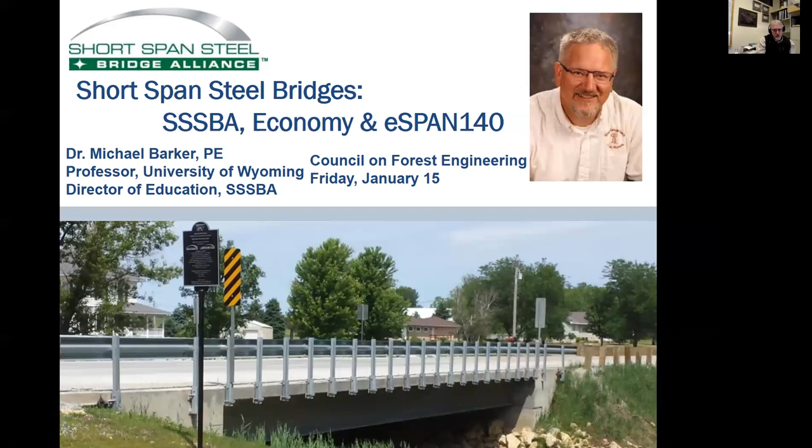So here's the plan for this first presentation. We will introduce the Short Span Steel Bridge Alliance and its purpose and functions. Of course, one of its functions is to represent the design and construction of short span steel bridges. As part of that, we will look at cost competitiveness of steel bridges for first costs and life cycle costs.

Then we're going to finish with a presentation on what's called eSPAN140, an online tool for preliminary steel bridge design for simple span bridges up to 140 foot in length, so that steel and concrete bridge alternatives can be compared easily without an undue and costly design for the steel bridge.

The Short Span Steel Bridge Alliance is an industry support alliance that is a group of bridge and buried soil structure industry leaders who have joined together to provide educational information on the design and construction of short span steel bridges and installations up to 140 feet in length. The purpose is to help owners and design engineers with designing and building short span steel bridges.

The Alliance was initiated in 2007 as part of the American Iron and Steel Institute, where the members are stakeholders in the steel bridge industry.

The Alliance was formed to address two main concerns with the construction of steel bridges. The first is a misconception across the United States that for shorter span bridges, concrete is always less expensive than steel. The second issue is that concrete bridge design is easy using charts and tables, whereas a steel bridge design is an individual piece of art for each design.

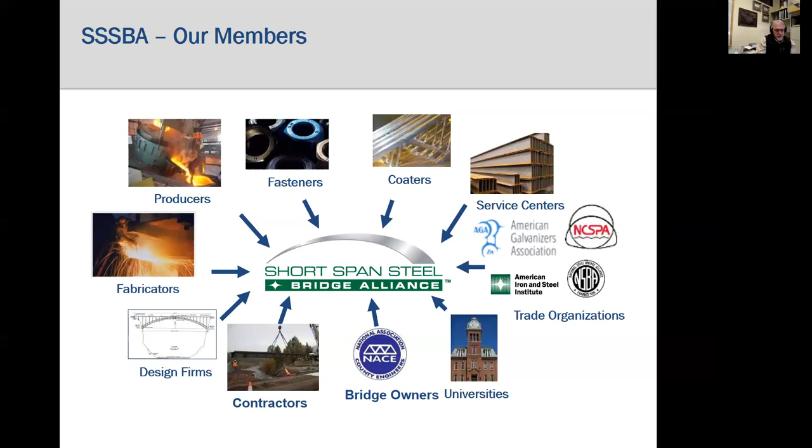The Alliance is involved with all aspects of short span steel bridge design and construction, including outreach and education. Example of that is today's webinar. Resources on all aspects of steel bridges, sample case studies, the simple design tool eSPAN140, innovative and accelerated bridge construction solutions, which we're going to look at on January 29th when we look at manufacturers that can deliver you a bridge.

www.shortspansteelbridges.org is the go-to location where a user can interact with the Short Span Steel Bridge Alliance.

So we start with that preconception that concrete bridges are less expensive than steel bridges in the short span market. Many owners and engineers believe this to be true, and many times steel is not even considered when there is a short span bridge need.

This is really unfortunate because that means owners may be paying more for their bridges than is necessary. If owners and engineers would compete steel and concrete bridges, the cost for both would be lower due to that competition. In fact, studies show that states or regions that do not even consider steel alternatives and only build concrete bridges pay more for those concrete bridges than states or regions that have a healthy competition between the two bridge materials. So now we're going to look at case studies of county and state bridges.

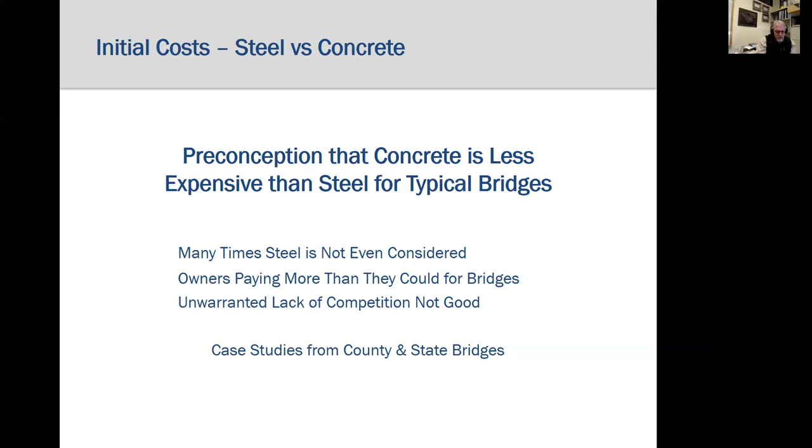The first case study is from Audrain County, Missouri, from 2012. These two bridges were built by an Audrain County work crew, so there is no contractor for the bridges. This is a special case study in that the Short Span Steel Bridge Alliance worked with the county engineer from before construction through the opening of the bridge to track the costs.

The Steel Bridge, Missouri Bridge 411, on the left here consists of 4 steel girders, a 47.5-foot span, a 24-foot roadway width, and a 2-foot structural depth. The concrete bridge, Missouri Bridge 336, on the right, consists of 6 precast hollow core slabs with a 50.5-foot span, a 24-foot roadway, and a 2-foot structural depth.

These two bridges were built in the same year and are nearly identical except for a small difference in span length. So the engineer was asked to keep a detailed account of the cost for the construction of the two bridges so that a direct comparison could be evaluated.

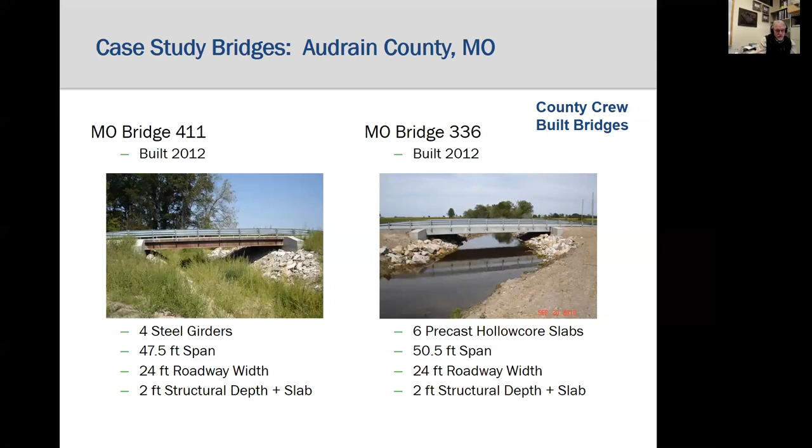This slide shows the total cost of the two bridges where the costs are broken into material, labor, equipment, guardrail, rock, and engineering. And we can see that for the total cost of these two bridges, the steel bridge has a 19.3% savings over the concrete bridge.

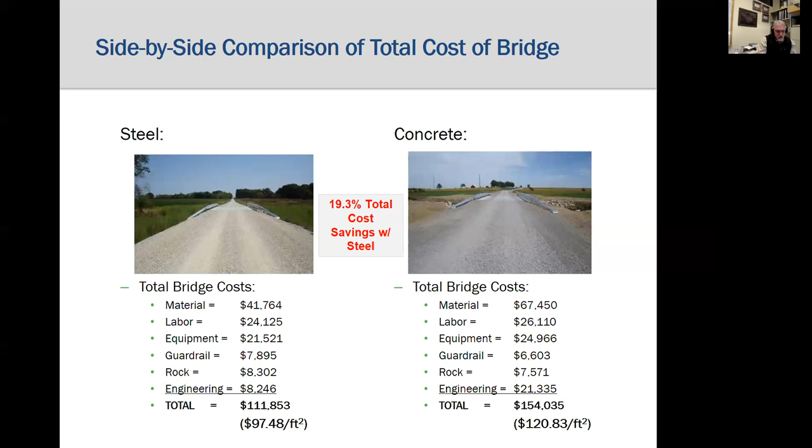The costs are calculated based on square footage of the deck area for an equivalent comparison since the concrete bridge is 3 feet longer. However, comparing only total costs can be deceiving given the different site characteristics of the two bridges. For instance, we see here that the concrete bridge had significantly higher engineering costs and lower rock costs.

So to be more fair and do a better comparison, the engineer was also asked to separate out only the superstructure costs so that an equivalent direct comparison could be made for the two bridges. These costs shown here represent the costs associated with only the superstructure. So this is a true apples to apples comparison of the cost for these concrete and steel bridges.

Removed from the total cost is all site prep work, grading, engineering, rock, abutments, and so forth. And we can see the cost for the materials, labor, and equipment for only the superstructure. We see that the steel bridge costs $37.54 per square foot and the concrete bridge costs $50.61. The steel bridge is considerably less expensive for this comparison.

One item to note is the equipment cost, where the steel bridge used a county-owned 30-ton crane. The concrete bridge girder members are heavy, and the county had to rent a 100-ton crane at a cost of $3,500. The other $500 for each under the equipment is a rented skid steer for incidental work.

However, even if the county needed to rent the 30-ton crane at a cost of about $1,500, that increases the steel bridge cost to only $38.88, still considerably less than the concrete bridge cost.

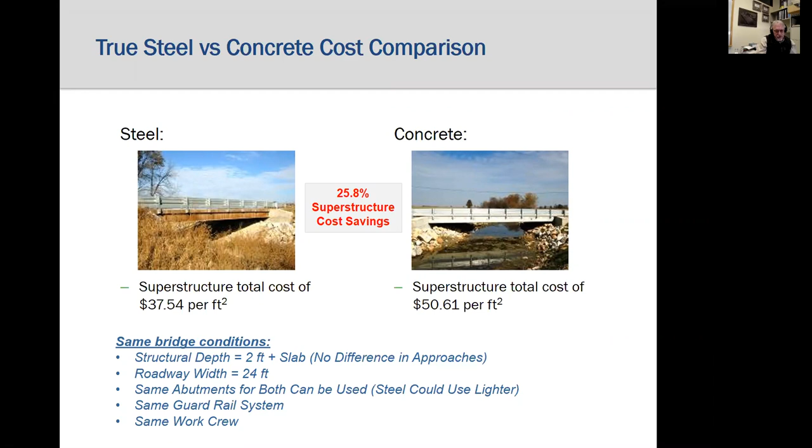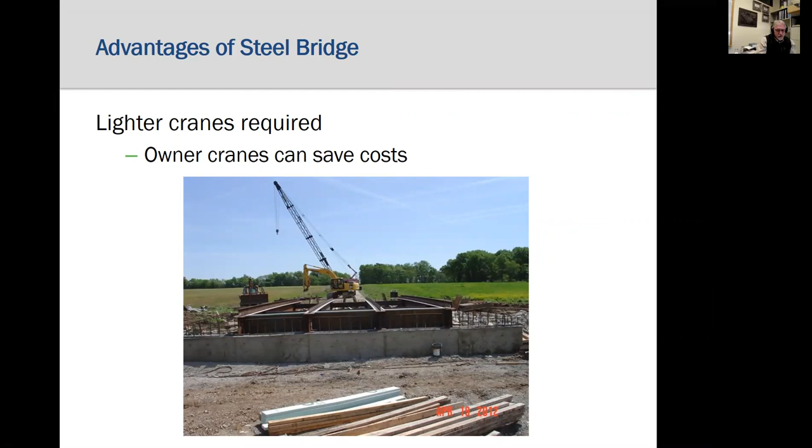The reason for these economies for steel bridges vary over the bridge fabrication and construction process. For instance, one reason steel is competitive is that the equipment requirements are less, since steel bridge components are considerably lighter than concrete components. For steel bridges, the dead load is significantly lighter and lighter abutments can be used, or even some of the economical modular abutment systems can be employed.

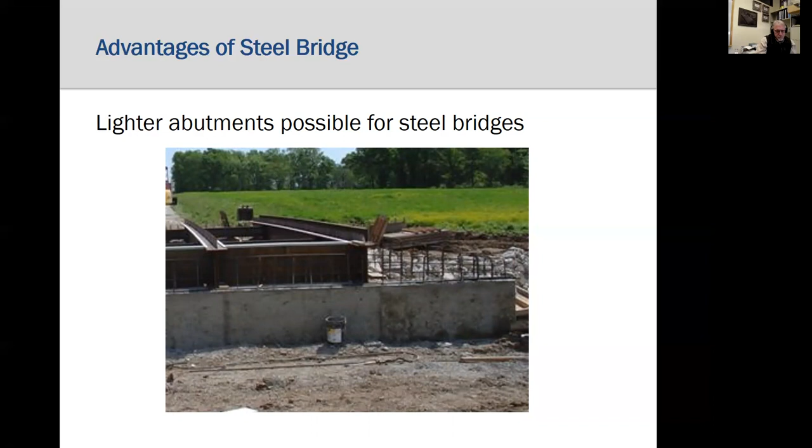Another benefit for the economy of steel bridges is the use of partial depth precast panels or corrugated metal deck systems that make the casting of the concrete deck efficient.

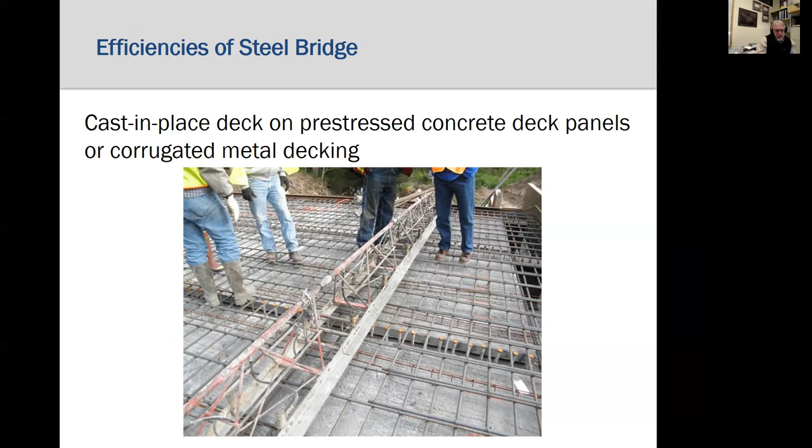We know that steel is a versatile material and that steel bridges can be made in many forms with complicated details in fabrication. However, these simple span bridges are simple span bridges and do not require complicated stiffener and diaphragm details. Simple details are cost effective and easy to fabricate and erect.

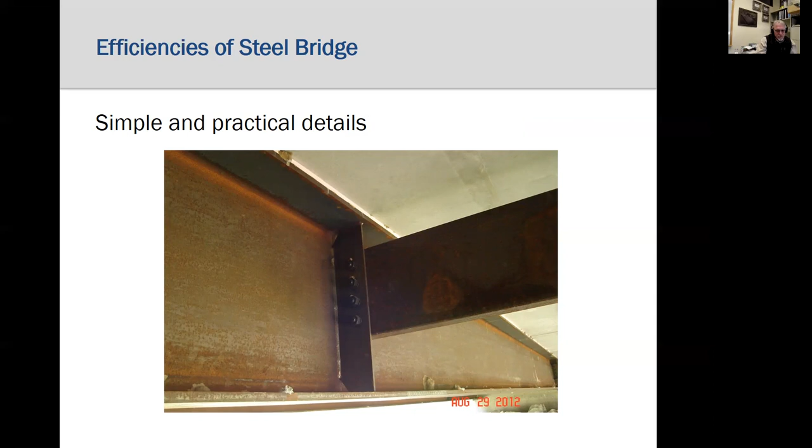Another costly component for bridges are rocker or pot bearings at the girder ends. For these simple bridges, simple elastomeric bearings can be used, and smaller bearings used due to the lighter weight of the structure. And of course, jointless decks with integral abutments lead to much lower deterioration rates and maintenance costs in the future.

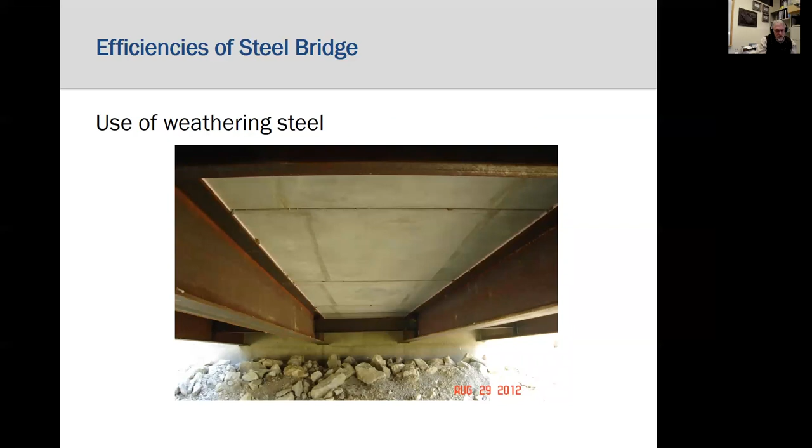Finally, one of the costs for steel bridges is corrosion protection, since unprotected steel rusts. However, weathering steel, when applicable, is low cost and requires little maintenance for long-term corrosion protection. If weathering steel is not applicable, galvanizing, metallizing, painting, or even the use of stainless steel may be a cost-effective method for corrosion control.

So that was one example. And of course, when I talk about that, people say, Barker, that's only one example. So the Alliance also worked with that county engineer on other bridges built near the same time frame.

This table looks at total constructed costs of an additional 5 steel and 4 concrete bridges in Audrain County. At the bottom row of the table, when we look at cost per square foot, we see that sometimes steel is less expensive and sometimes concrete is less expensive. This is healthy competitiveness and is good for the owner.

These are examples of county bridges that show that both steel and concrete are competitive in the short span market, and both should be considered. Not shown here due to time, the Short Span Steel Bridge Alliance has many more similar examples. These examples were county-owned bridges.

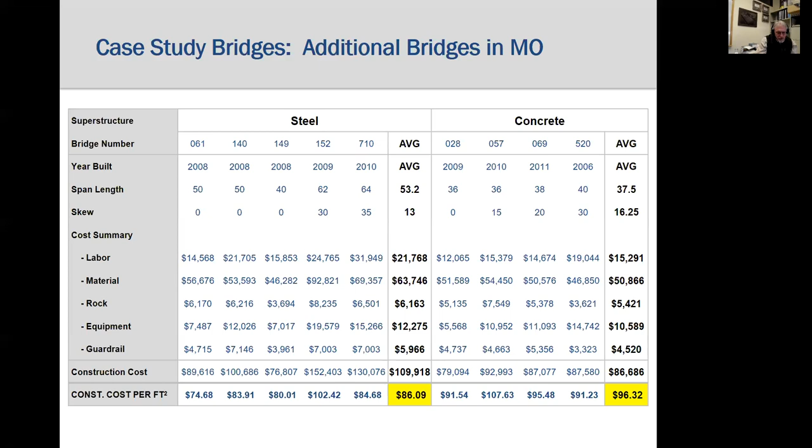Next, we're going to look at a couple of state bridges, still in Missouri. Again, here are 2 nearly identical bridges, one steel and one concrete, that cross over the same highway near Columbia, Missouri, where I used to live. Both are 2-span, with the steel bridge just a little longer and a little bit wider.

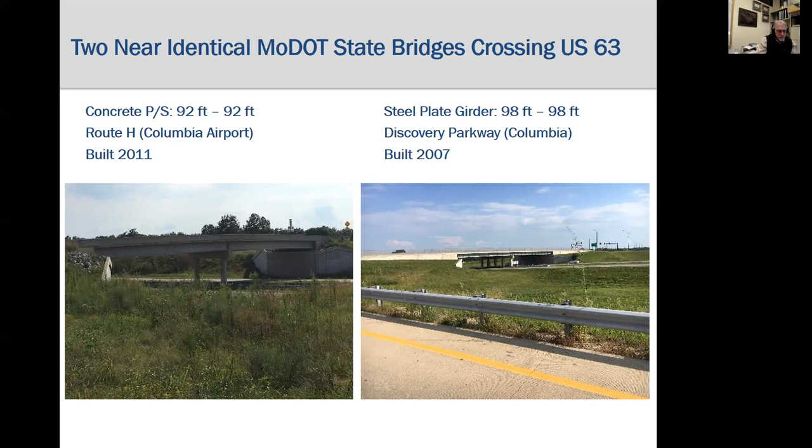So the total cost will be divided by the deck area again for comparison. These were both design bid build projects with a contractor constructing the bridges. So here are the costs for the two bridges.

Now both had non-bridge items such as conduit systems, a pedestrian fence, and an architectural facade, and these costs were removed as shown here in green from the total cost since they are not structural. We see that the concrete bridge comes in at $77.71 per square foot and the steel bridge costs $72.94.

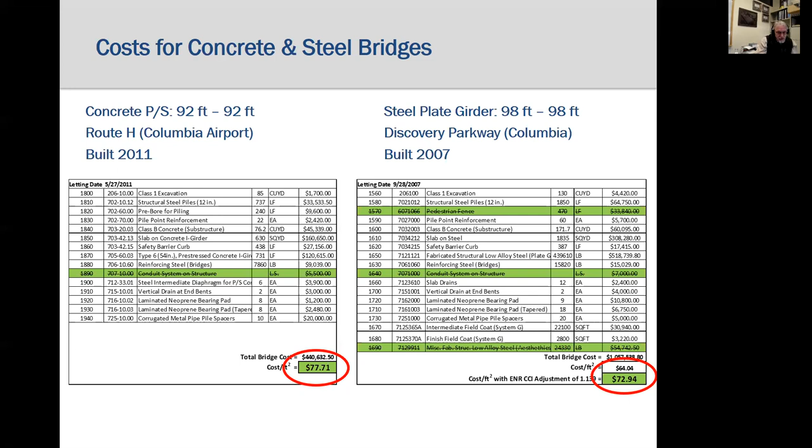However, there is a 4-year difference in when these two bridges were built. The concrete bridge was built in 2011 and the steel bridge was built in 2007. So to account for the age difference and inflation, an Engineering News Record construction cost index of 2.7% per year was used to bring the costs up to a common year of 2017. Here we see that the steel bridge cost less at $85.58 than the concrete bridge at $91.18.

So I went through all this because of that preconception. From what we have seen here, and with many more examples not shown here, we see that steel is competitive with concrete bridges in the short span market, and that owners and engineers should consider both materials for their bridge needs. The preconception that concrete is always less expensive is a misconception. Both are competitive, and competition is good for the owner and the public.

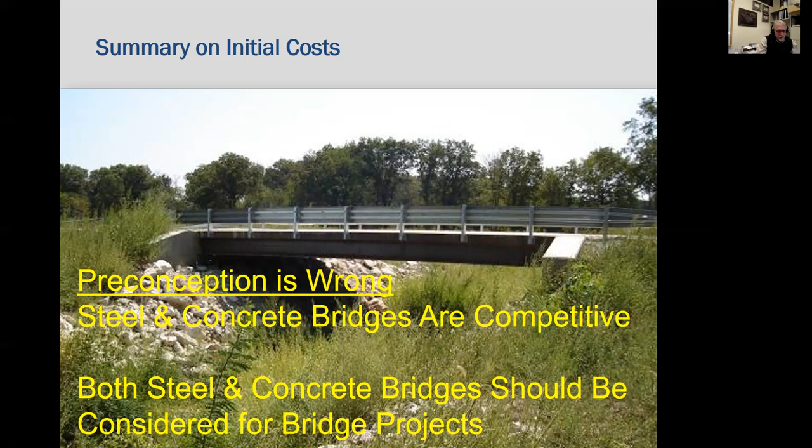So that's the first part of my presentation.

Now, first cost is just the cost for putting the bridge in place. Responsible owners are also concerned about future maintenance costs and service life.

The question about life cycle costs routinely comes up. What is actually asked is, which type of bridge is best for life cycle costs? Both the steel industry and the concrete industry have offered anecdotal evidence, but have not, until now, had good evidence on which bridge type is best.

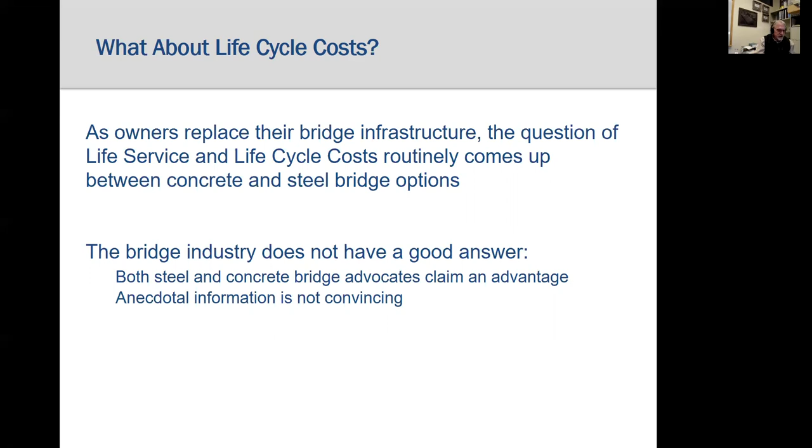So a study was conducted that examines the historical life service, meaning performance and maintenance, and the historical agency life cycle costs, meaning the true cost for building and maintaining the bridge over its life, of steel and concrete bridges in Pennsylvania. A historical study was conducted so that the results show what actually happened to the bridges instead of anecdotal guesswork from the steel and concrete industries.

The Pennsylvania DOT had good records of their bridges and offered the PennDOT data for their study, and I certainly want to acknowledge them.

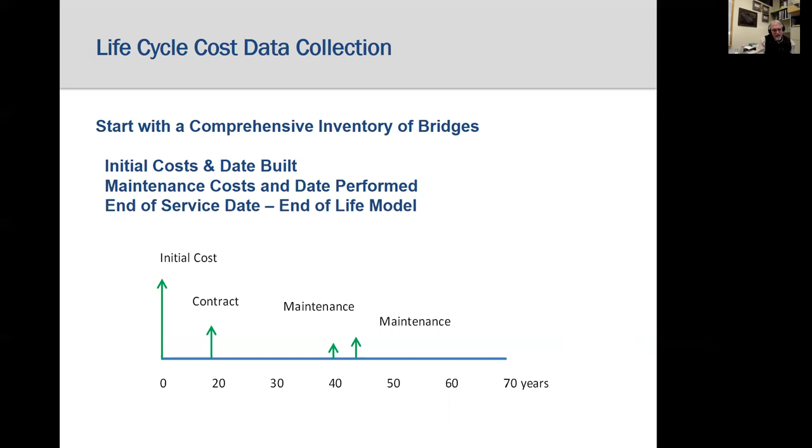So to determine a life cycle cost for a bridge, one needs to know the full history of that bridge. This includes the initial costs and the year it was built and all maintenance that occurred over the life, including department and contractor maintenance, and of course the lifespan of the bridge or when it will be replaced. Since I used the PennDOT database, all of the bridges in the database were still in service, so an end of life model is needed to estimate the life of the bridge.

The study's objective was to compare life cycle costs of typical concrete and steel bridges. There were criteria that each bridge had to meet to be included in the study. The criteria included considering only typical steel and typical concrete bridges, selected as precast I-beam, precast box where the boxes were adjacent to each other, precast boxes where the boxes were spaced apart, steel rolled beam, and steel plate girder bridges. In addition, both precast concrete became a mainstream construction method, and modern steel design and detailing started in about 1960, so bridges built after 1960 were considered.

Each bridge used in the database had to have complete records for initial costs and date built, and accurate dates and costs for any type of maintenance, whether department or contractor maintenance. Since the study was looking for typical bridges, it removed any bridges that had exceedingly high or exceedingly low initial costs. All the costs used in the study are based on the PennDOT recorded costs.

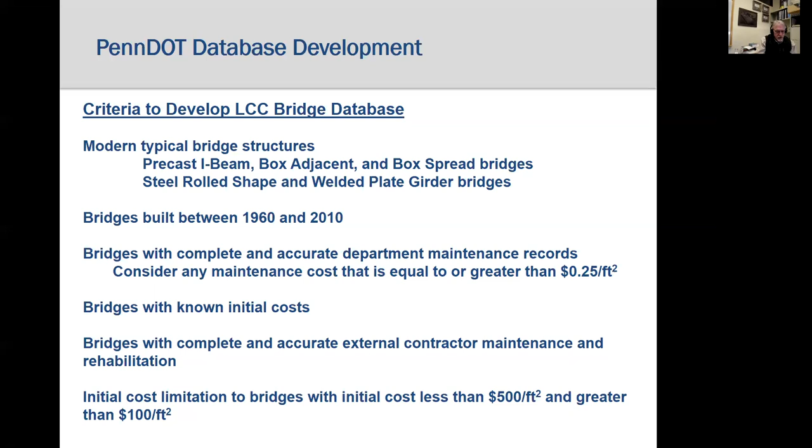PennDOT has over 25,000 bridges in their database. Of those, almost 8,500 are of the 5 types considered in the study. And of those 8,500, over 6,500 were built between 1960 and 2010 for a potential study database.

When these 6,587 bridges were subject to the criteria, many of them did not have accurate and complete life history information, which left a database of a little over 1,700 for the life cycle cost study. This is over 25% of the potential bridges represented in the life cycle cost study, which is a pretty good representation.

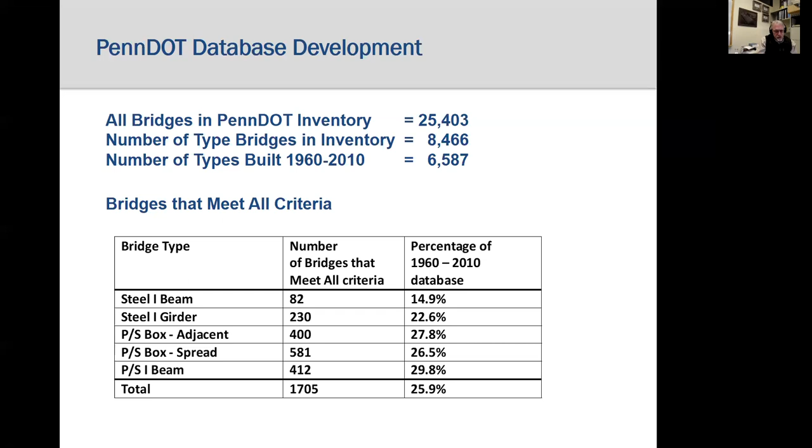All of the 1,700 bridges are still in service, so a bridge life model needed to be developed to predict when the bridge would be taken out of service or replaced. The model is based on the inspection superstructure condition rating, which varies from 0 to 9, 9 being a perfect bridge, and I don't even know what a 0 is, never seen one.

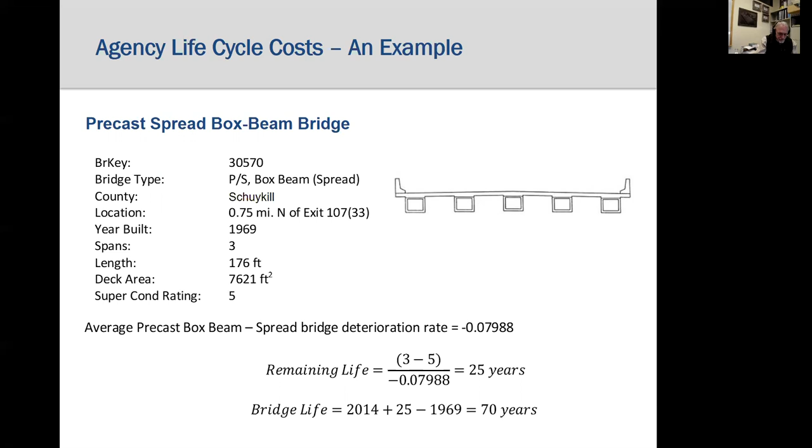In 2014, the base year for the study, the superstructure condition rating was a 5. Knowing the average deterioration rate for spread box bridges is 8%, the estimated remaining life when the condition rating reaches a 3 is 25 years. Given that the bridge is 45 years old, the predicted lifespan of the bridge is 70 years.

To compare life cycle costs over the database, inflation has to be taken into consideration. So all of the bridges were assumed to be built in 2014, and all of the costs inflated by the Engineering News Record construction cost indices, like we saw for the earlier case study.

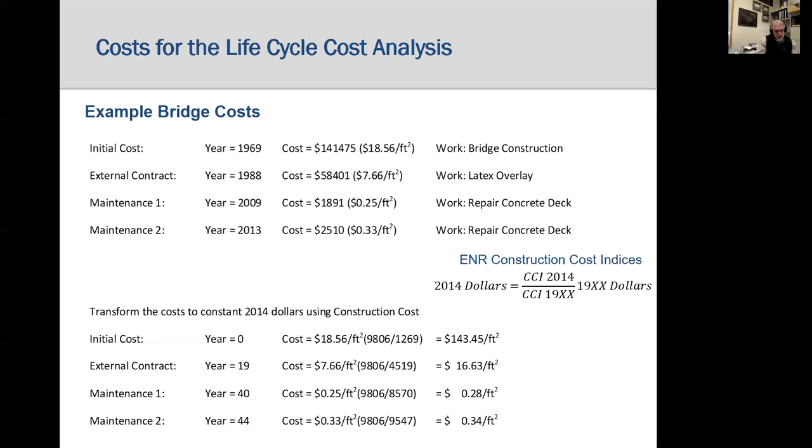So this bridge in 2014 dollars cost $143.45 per square foot, and the maintenance costs in 2014 dollars occurred at years 19, 40, and 44. The study uses constant 2014 dollars for all future costs since the discount rate considers inflation for the future.

So now the life cycle of the bridge can be developed with dates and costs in 2014 dollars. Using a discount rate from the Federal Office of Management and Budget of 2.3% that takes into consideration inflation of future 2014 dollar costs, a present value cost of the bridge's life cycle can be determined to be $154.50 per square foot by discounting the future costs to the year 2014.

This means that if $154.50 per square foot was put away when the bridge was built, the amount could pay for the initial costs and all future costs for that bridge cycle. However, we cannot compare the present value cost of a bridge that lasts 70 years to a bridge that lasts only 40 years because the outcomes are not equal.

A way to compare different lifespan bridges is to use perpetual present value costs, also called capitalized costs, by assuming the bridge is replaced after each cycle in perpetuity. For this bridge, the capitalized cost is $194 per square foot, which means if that amount was put away today, it could pay for the first cycle of the bridge and replacement of that bridge every 70 years forever.

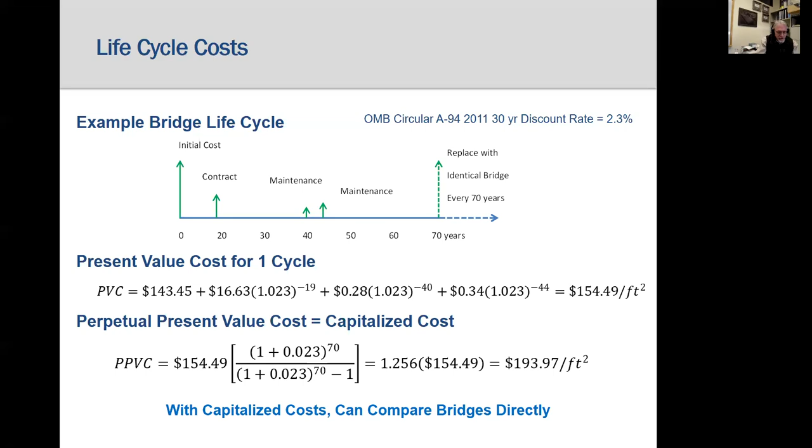With capitalized costs, we can now compare all of the bridges in the database directly. To further make sure, the study compared typical bridges for the 5 types of bridges. Bridges that had capitalized costs outside of 1 standard deviation from the mean of the bridge type were removed.

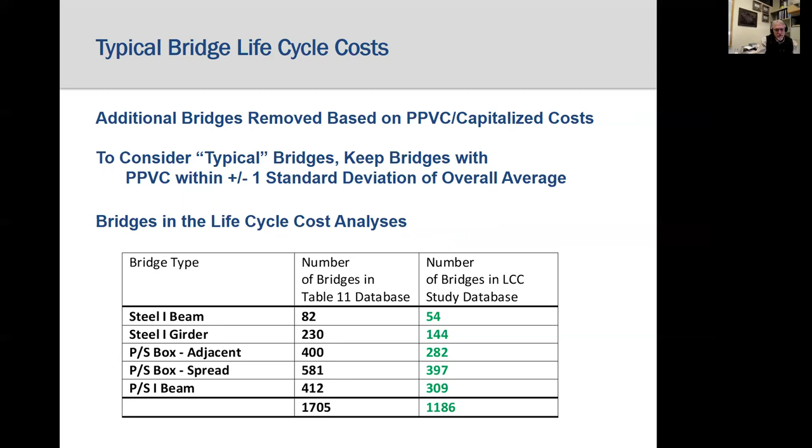That's a statistical thing we like to do, but I can tell you, even when I just left everything in there, the results did not change. This left almost 1,200 bridges of the 5 different types that were used to study the results.

The bridge database was organized by bridge type in 3 Excel worksheets for each type. The first worksheet was the bridge information with location, years built, number of spans, bridge length, deck area, geometry, and bridge materials. The second was the department and external contractor maintenance performed on the bridge. And the third was the initial and life cycle cost results. So the studies and the final report were produced from this database of bridges.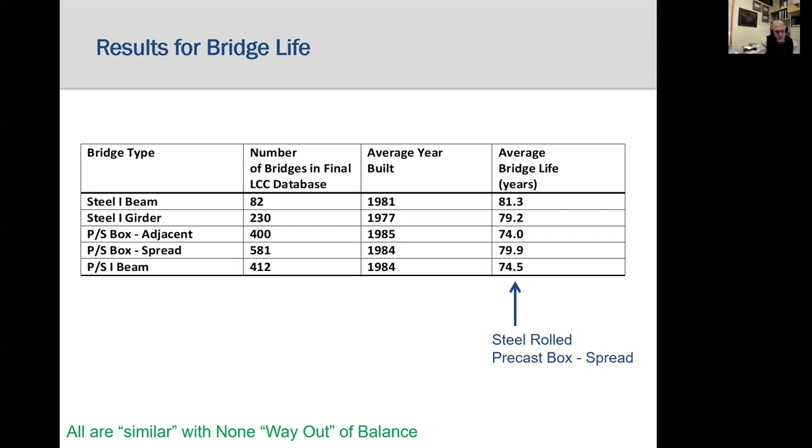So those are averages. I think a good way to look at predicted life that considers not only the average life, but also the standard deviation of the life is what's called a statistical cumulative density function, or CDF. Here it is assumed that the data is normally distributed.

With the CDF, a question can be asked: what is the probability that a given type of bridge will last at least 75 years, which is the expectation for modern bridge construction? The results show there is a 73% chance that a rolled beam bridge will last at least 75 years, and a 65.6% chance that a precast spread box bridge will. Those were the top 2 performers for life.

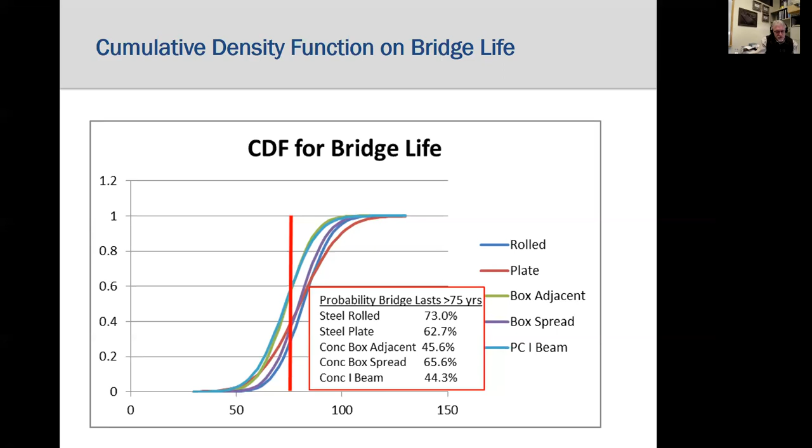However, when we consider not only the average but the standard deviation, the data also shows there is only a 44.3% chance that the precast I-beam bridge will last 75 years or more, which was a little surprising.

Next, this table shows the results for capitalized costs for all the bridges in the database. Capitalized costs here are under that column PPVC, perpetual present value cost. Here we see that the precast I-beam bridge has the lowest capitalized cost, and the steel rolled beam is second.

The table also shows in the additional columns the initial cost, the present value cost of future maintenance, the average length of the bridges in that type of bridge database, average number of spans, average year built, and average life.

This is where we need to be careful with comparisons. Directly comparing all of the bridges without considering the differences in these variables can lead to misleading results. For instance, plate girder bridges in the database have an average of over 4 spans per bridge, whereas adjacent box precast bridges average just over 1 span per bridge. Number of spans, along with average length of the bridge, along with other variables, has a significant impact on costs.

In a couple of slides, I'm going to look at a more consistent set of bridges based on span length for a more consistent comparison. And of course, the full report examines these different variables in depth.

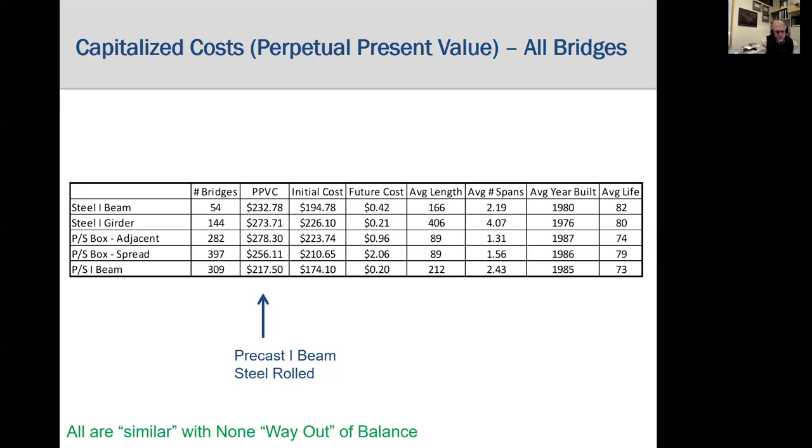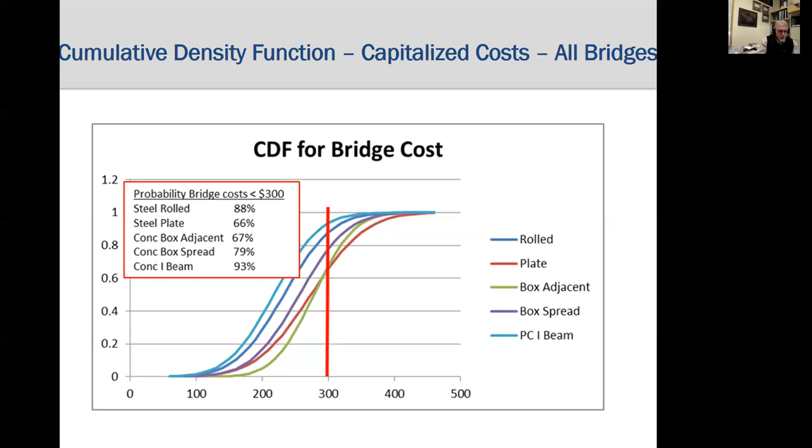So the CDF results show that there's a 93% chance that a precast I-beam and an 88% chance that a steel rolled beam bridge have capitalized costs less than $300 per square foot in Pennsylvania.

So now, back to the original question from owners: which type of bridge is best for life cycle costs? Precast box adjacent, steel plate girder, precast box spread, precast I-beam, or steel rolled beam bridges?

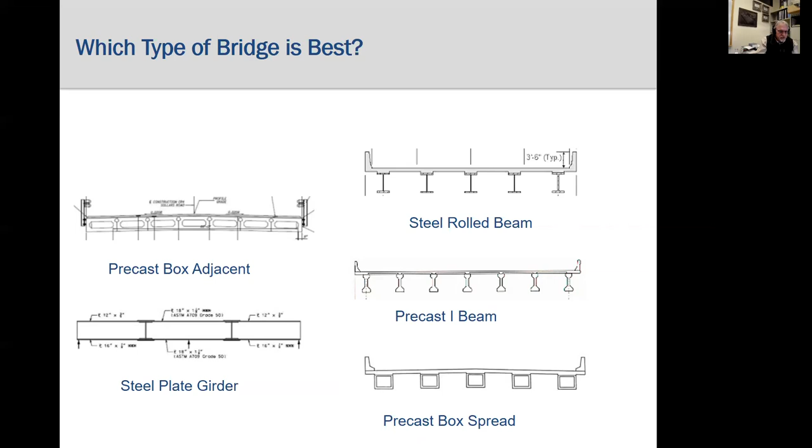This is where we come back to that statement that all are similar, with none way out of balance. The overall weighted average capitalized cost for the 5 types of bridges shown toward the top in the middle is $252.40 per square foot. Each bridge type average is within 14% of that weighted average.

Knowing that the standard deviations for the different bridge types range from $48 to over $65 per square foot, or a better way to look at that is with coefficients of variation ranging between 20 and 25%, that coefficient of variation compared to within the average of 14% means that any one type of bridge may be the most economical for a given bridge project.

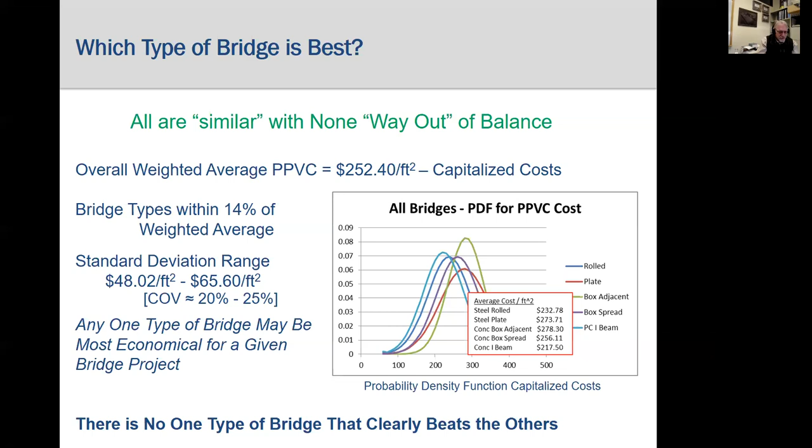There is no one type of bridge that clearly beats the others. And so the conclusions of the life cycle cost part of this presentation are that typical concrete and steel bridges are competitive on initial costs, future costs, life cycle costs, and bridge life. For any given bridge project, concrete or steel bridge types may be the most economical. Again, that preconception that concrete is always less expensive is a misconception.

I even bolded it because this is the big conclusion: owners should consider both steel and concrete alternatives for individual bridge projects. Competition between steel and concrete bridges is healthy for the bridge industry, the owner, and the public.

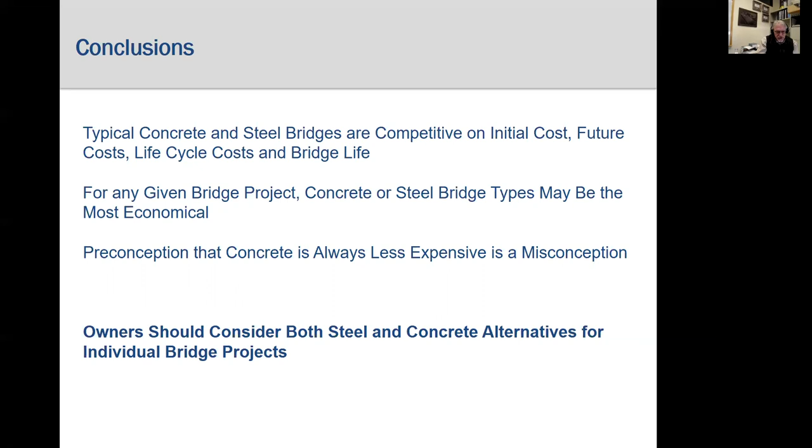So next we're going to look at the easy, online, and free eSPAN140 software package that can give a designer a preliminary steel bridge design in a matter of minutes.

If we are going to consider both steel and concrete for every bridge project, we need an easy method to produce a preliminary steel bridge design for comparison to concrete. Because, as mentioned earlier, one of the objectives of the Short Span Steel Bridge Alliance is to develop standard simple span, rolled beam, and plate girder bridge designs.

With eSPAN140, an owner or an engineer can produce a steel bridge design in just a few minutes that meets all the AASHTO requirements. The standard designs use common rolled beam and common plate sizes and simple details for economy. The designs are for span lengths from 20 foot to 140 foot in 5-foot increments, and 4 different girder spacings are considered. The standard designs give the engineer the girder design, including fabrication details, shear stud and stiffener layouts, cross frame design, the deck design, and the end bearing design.

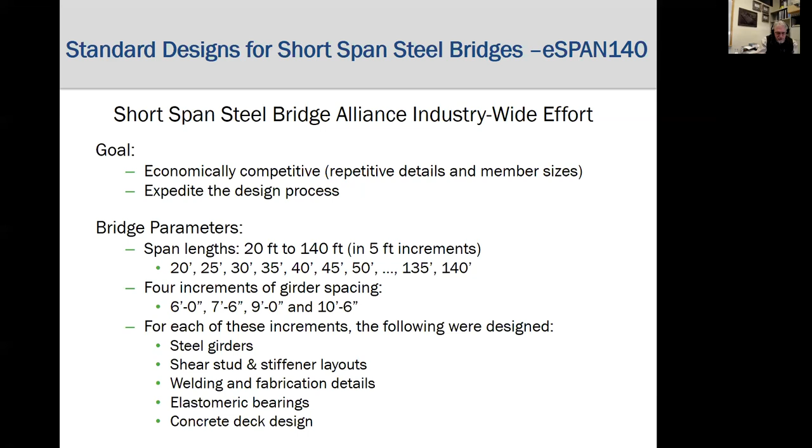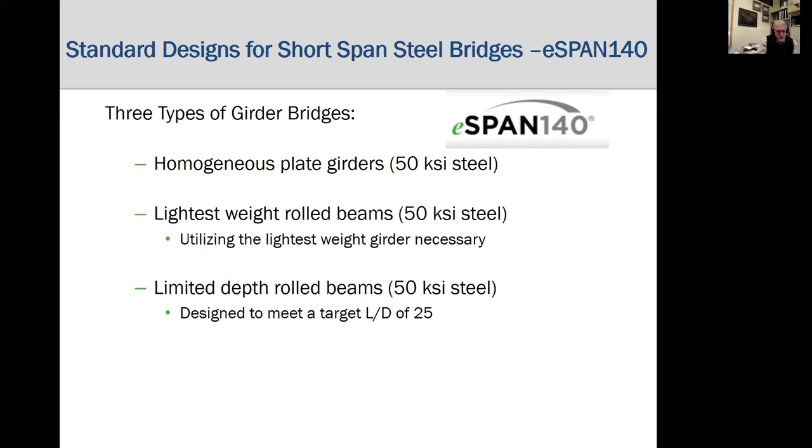For plate girder bridges, the solution will produce homogeneous girders where the web and flanges are built from 50 KSI material. For rolled beam bridges, the solution gives both a lightest weight design and a limited depth design. When replacing existing bridges, many times a smaller depth is more economical overall, even though the steel weight is heavier, because with a smaller depth, existing approach work does not need to be changed as much.

The AASHTO load and resistance factor design specifications have several design limit states that need to be checked. The standard designs were developed to meet the Strength 1 safety design limit, the Service 2 and the live load deflection serviceability limits, fatigue limits, and the constructability requirements for the construction of the bridge.

For the designs, the standard AASHTO HL93 vehicular live load was applied, but there needed to be assumptions for the dead loads on the bridge due to the owner's selection of building materials. Conservative values were assumed so that the designs will meet the different configurations that may be built. And then the designs assume a maximum overhang width of 3 feet.

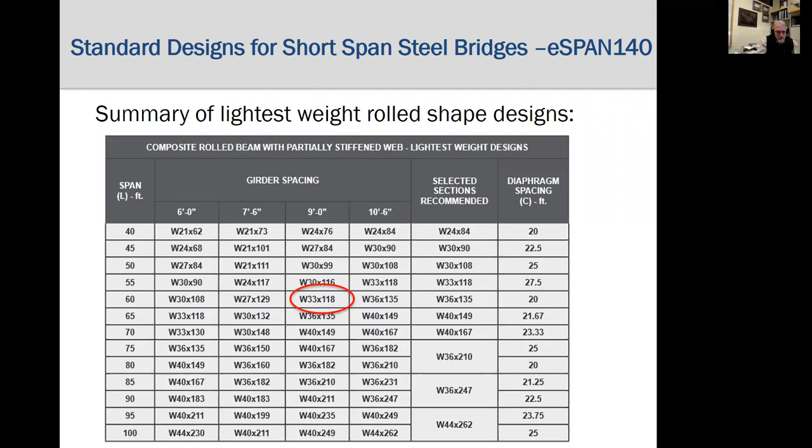Now, eSPAN140 is not really design software. It is a lookup table for the bridge characteristics. Since the designs are standard, any 60-foot long simple span bridge with a 9-foot girder spacing would result in W33 by 118 rolled beams. This table shows the matrix of standardized lightest weight rolled beam shapes based on span length and girder spacing. It also gives the diaphragm spacing on the right side for the constructability design limit. And then similar tables are used for rolled beam limited depth and the homogeneous plate girder designs.

eSPAN140 is a free resource. It can be found through the Short Span Steel Bridge website or directly through eSPAN140.com.

There are 3 steps to producing a preliminary steel bridge design. First is to create a user account—yep, the Alliance wants to know who's using their product. Second, input your bridge characteristics. Then eSPAN140 will produce a solutions book with the designs.

Now we're going to step through eSPAN140, but we will not pay much attention to the details. The best way to learn what eSPAN140 can do for you is to try it out with an example bridge and assess what it can do for you.

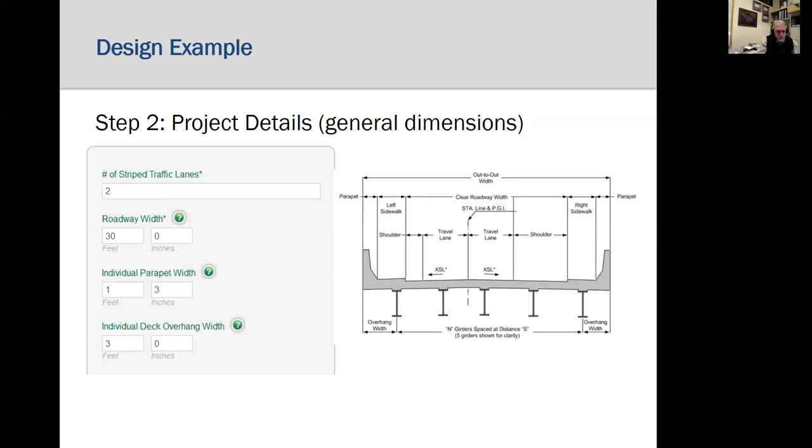So after creating an account for step 1, you are ready to design your bridge. You input the basic information, for instance span length. You define the number of traffic lanes, the roadway width, the parapet width, and the overhang width. You add sidewalks, if there are any.

Describe the skew, the daily traffic for fatigue checks, and the design speed. And now you are ready to view the solutions book. It's that easy.

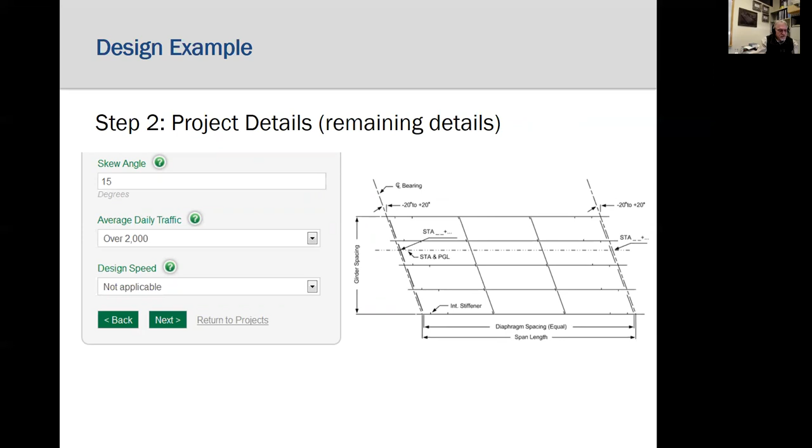The solutions book will provide rolled beam and/or plate girder designs according to this chart shown here. For instance, if your span is 40 foot, you will get a rolled beam solution. If the span is 100 foot, you will get a rolled beam and a homogeneous plate girder solution.

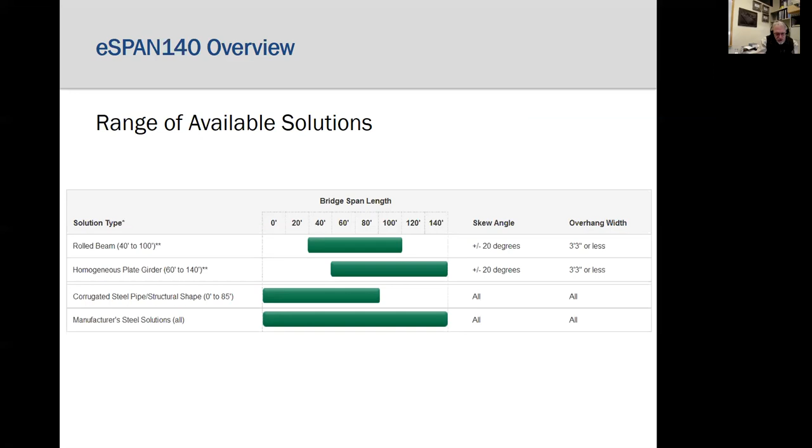We're not going to discuss the corrugated steel pipe or structural shapes. We're going to look at some of those in the presentation on the 29th.

The solutions book comes as a PDF file and contains the standard designs and additional information to help the owner or engineer. We're going to again just briefly look at those here.

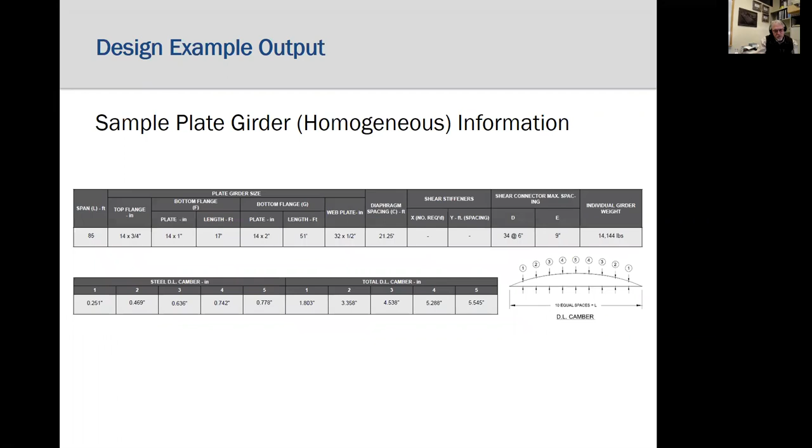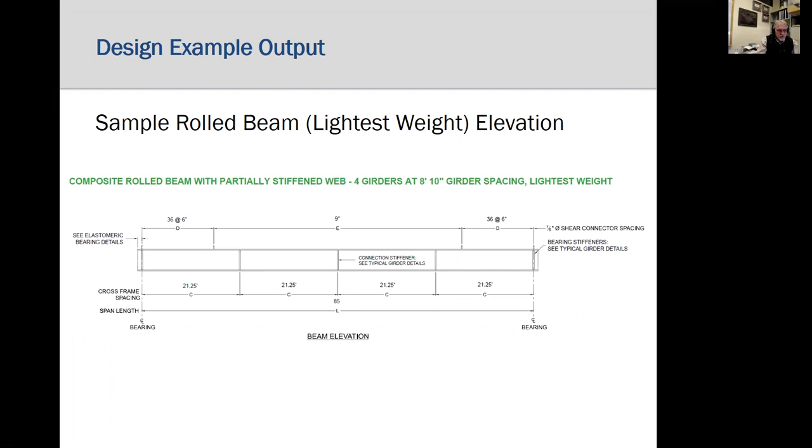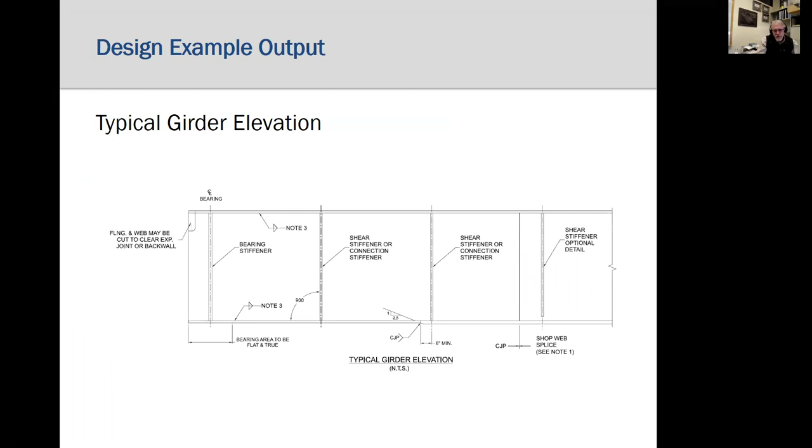There are also drawings for the typical details shown here for the plate girder. Simple details have been designed for easy fabrication and economy. Here are the bearing, intermediate, and connection plate stiffener details.

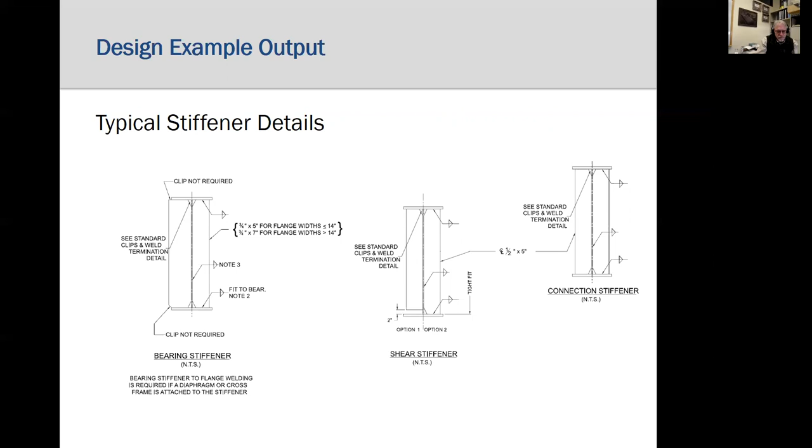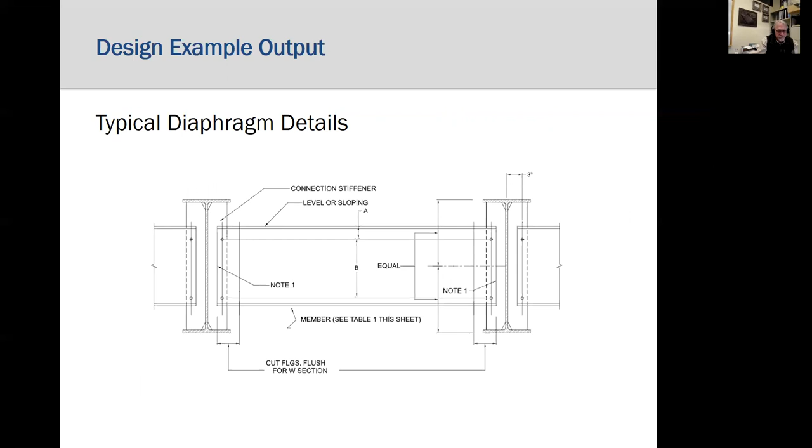The simple and economical bent plate or channel diaphragms are adequate for these simple span steel bridges. The stud layout is shown on the elevation views, and the deck design is by the AASHTO empirical method. Finally, the simple elastomeric end bearings are adequate and economical for simple span bridges.

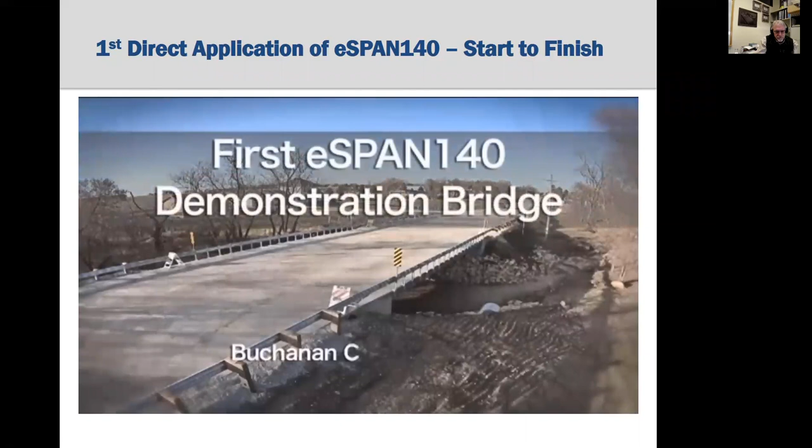This is a story of a bridge constructed in Buchanan County, Iowa, from start to finish, the first built using a design created with eSPAN140. This project was a collaboration between Buchanan County, the Short Span Steel Bridge Alliance, and its university partners, made possible by the donations of various Short Span Steel Bridge Alliance members.

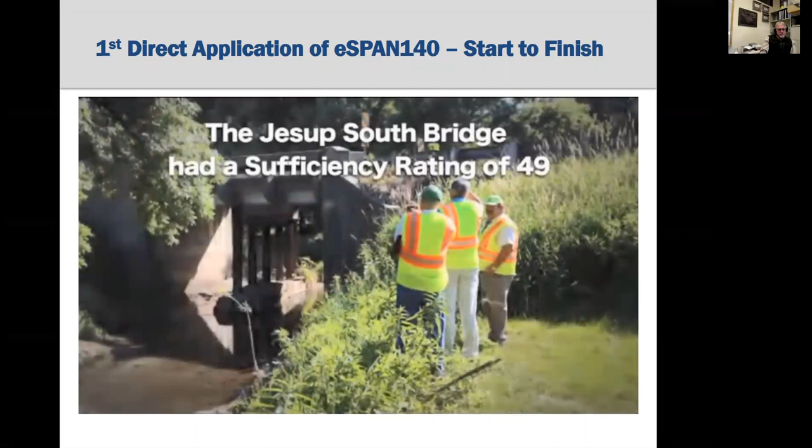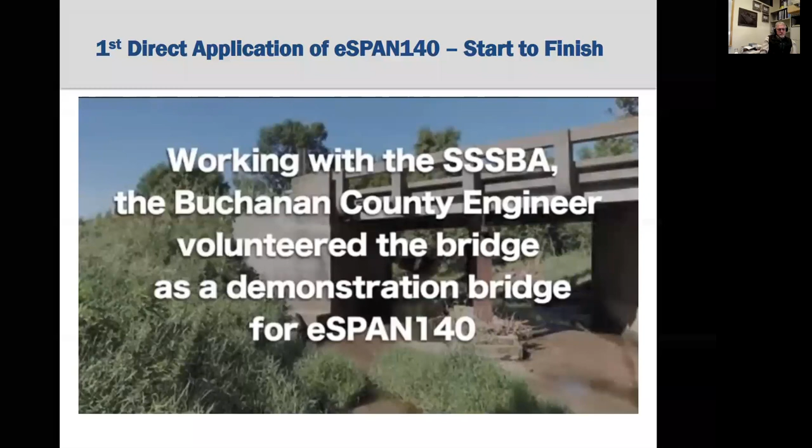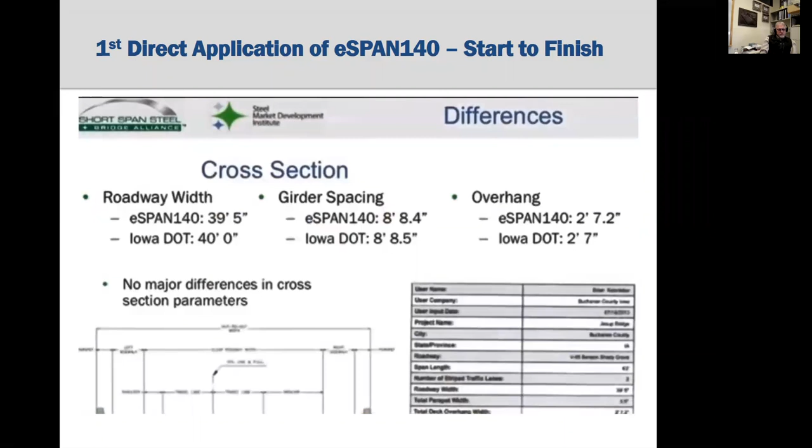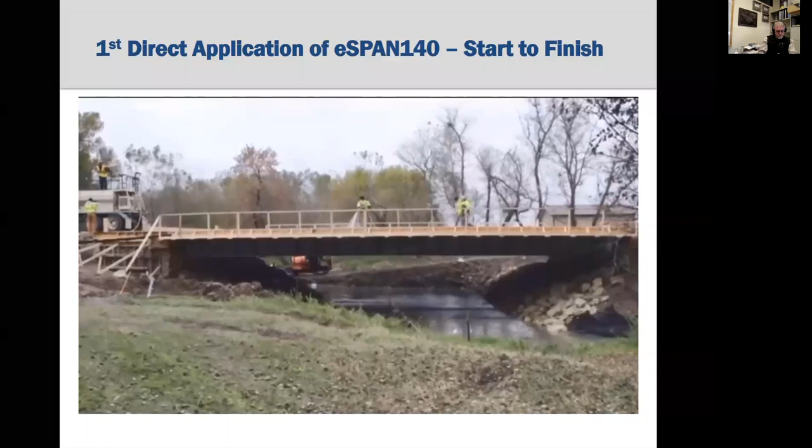Basically, this is a bridge replacement on Buchanan County's heaviest traveled county road. Started out with the design, so I used the eSPAN140 computerized system for doing the design, putting the plans together. I'm not real computer literate, but I found it exceptionally easy. We build quite a few bridges ourselves, and what this does is give me another option, so I can start comparing prices and find out what's going to be the most economical answer in each location. Prior to eSPAN140, I didn't have that tool and wasn't even looking at the steel bridge options.

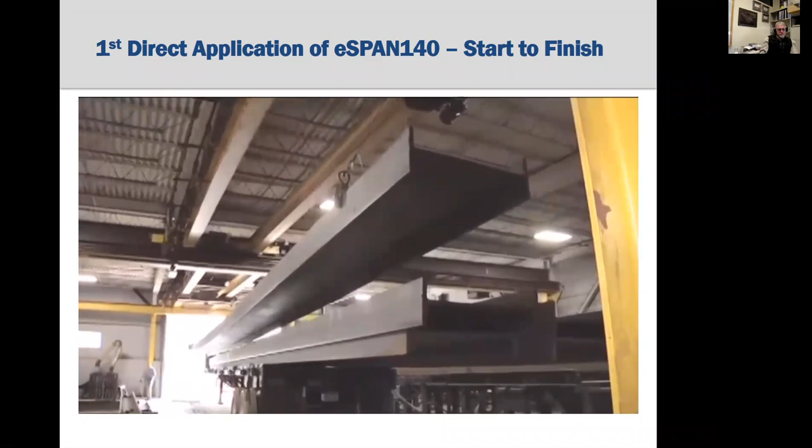We took the automated design out of the eSPAN140 and modeled it in our CAD workstations. We export the results of that into our computer controlled machines, and then from there the line processing happens. They come in to approximate length within a few inches, and then they are cut to exact length so that the bearing points are exact to match a survey in the field, and the distance beyond the bearing points is exact so that they can create an expansion joint at either end of the bridge.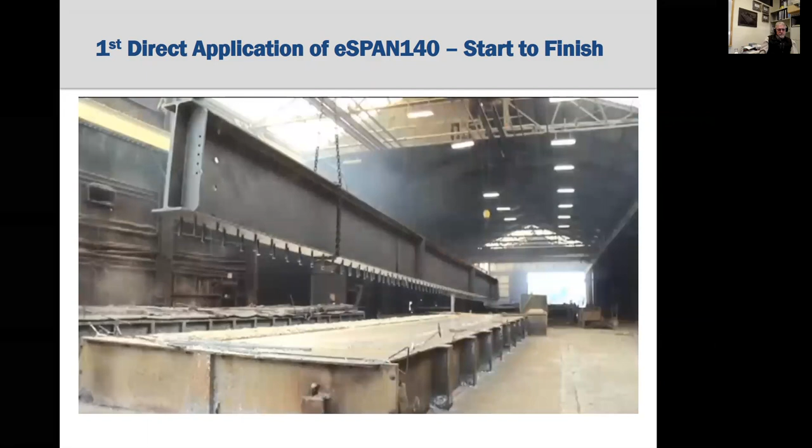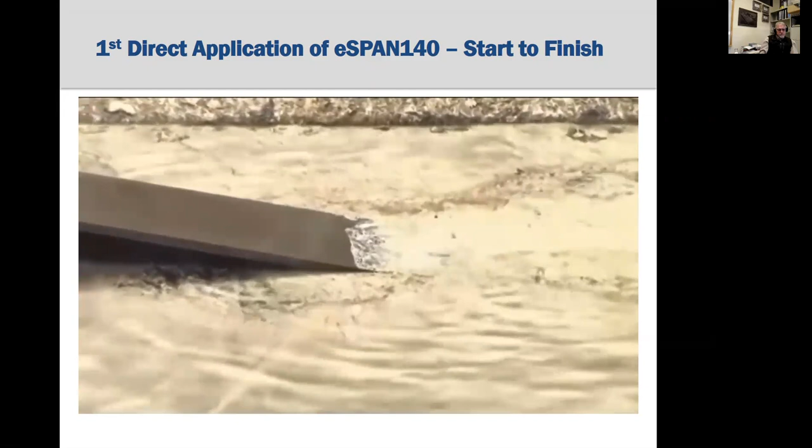We really recommend hot dip galvanizing. It's a very low maintenance or maintenance-free type of corrosion protection. It metallurgically bonds to the steel under the conditions in the zinc kettle and protects those beams for over the 50-year design life of the bridge, up into 75 years plus.

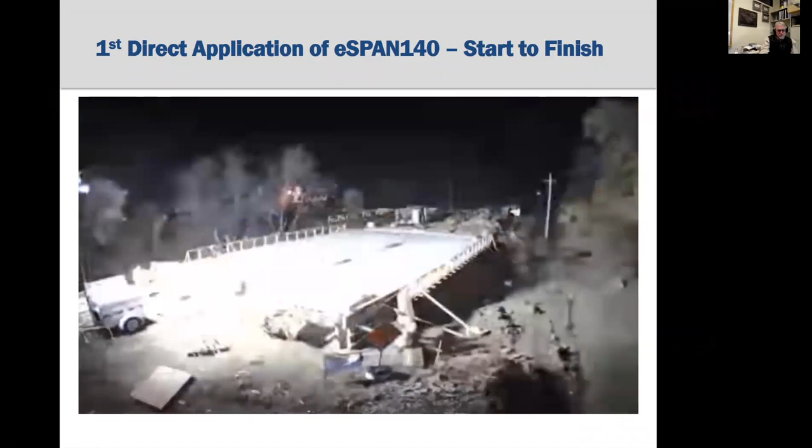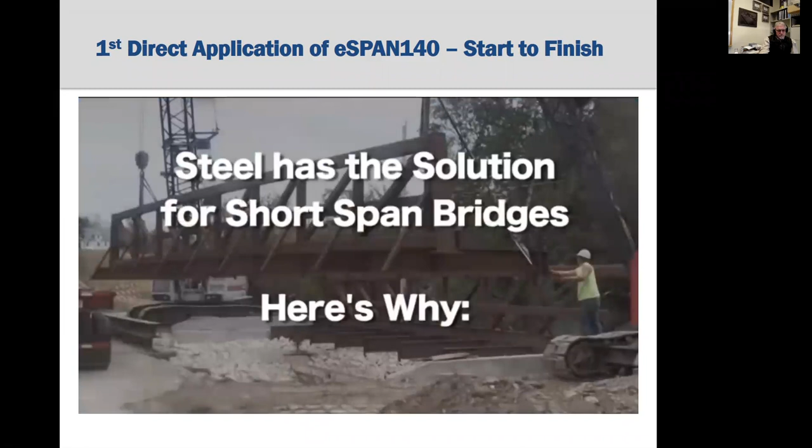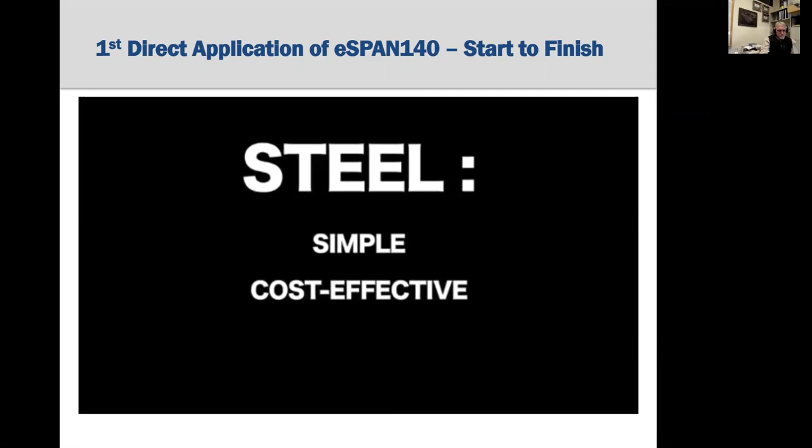For county engineers, the opportunity to see that this bridge can be put in place very simply and very cost effectively, and also have a very safe design, allows them to have confidence that eSPAN140 is a tool that they can use in their county to design bridges using steel.

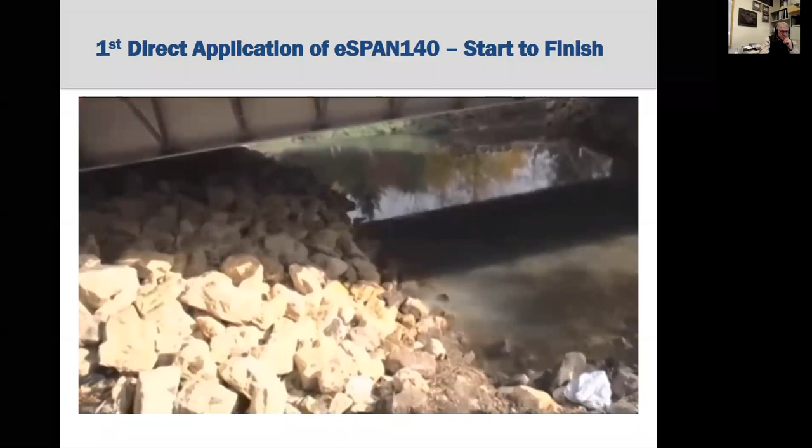So if you can clear span things, then what that does for you is it eliminates the need to try and build a pier. So if you can go up to 140-foot spans, that's tremendous. The other thing going on is the steel beams are lighter than the concrete beams, so it doesn't take the heavy equipment. If you're not dealing with some real long lengths, you're probably able to just set them with a hydraulic excavator rather than bringing in a crane.

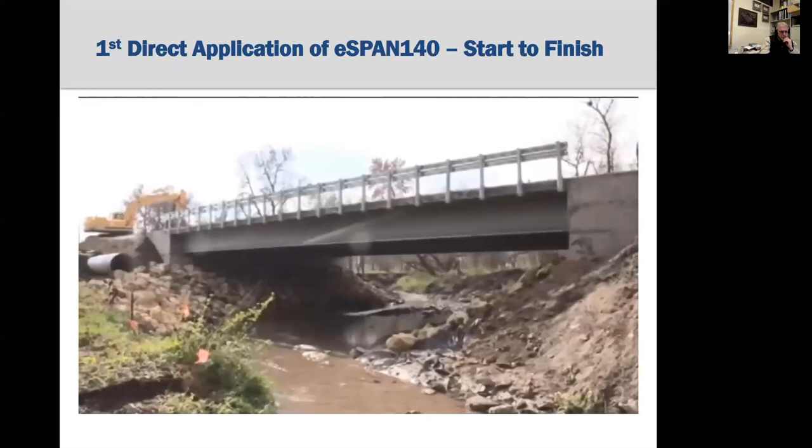Okay, so that's a little video, a bit of marketing, but an interesting one.

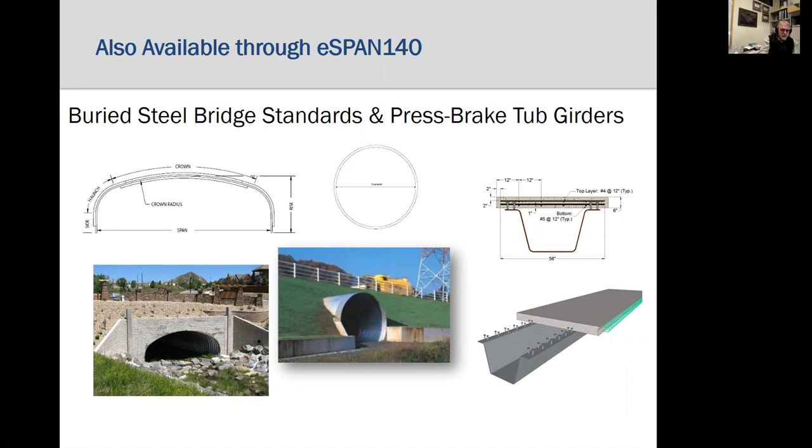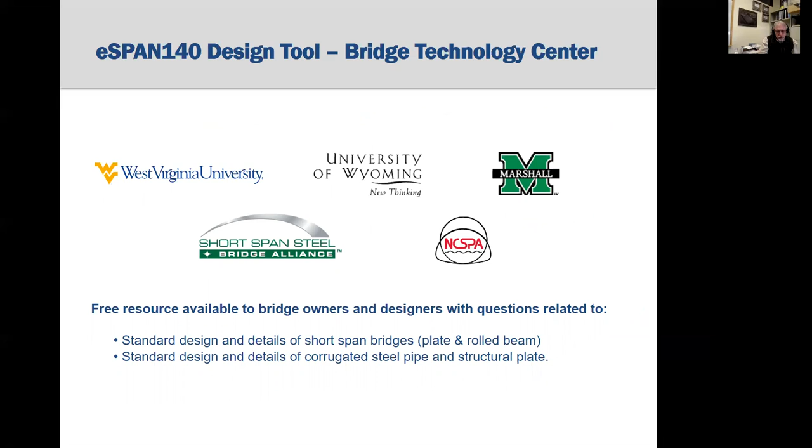Now, I did not discuss in this presentation, but eSPAN140 can also offer corrugated steel pipe, structural plate, and press brake tub girder solutions. We're going to look at some of those in the January 29th presentation. eSPAN140 is supported through the Short Span Steel Bridge Alliance Bridge Technology Center, where you can submit questions and get help considering short span steel bridges.

So to conclude, eSPAN140 will produce a preliminary design for short span steel bridges, and it is very easy to use. As we discussed before, the best way to see if it is useful for your bridge needs is to try it with an example bridge project.

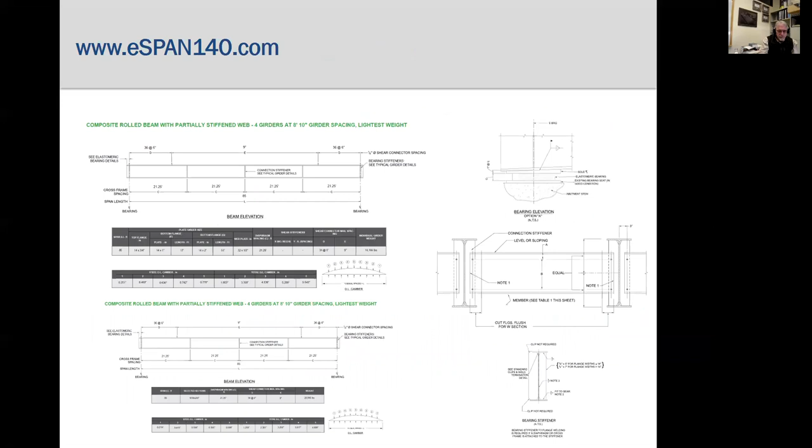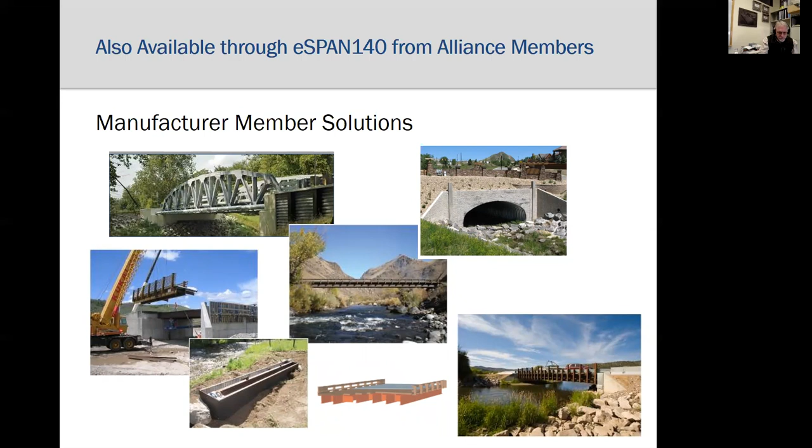The Alliance also provides what are called manufacturer solutions. These are bridges produced by Alliance members that they will design, fabricate, and deliver to your bridge site, most applicable for accelerated bridge construction. We're going to look at many of these bridges in the January 29th presentation.

So that completes today's presentation. We looked at the costs and life cycle costs of steel and concrete bridges. We saw that both are competitive, and owners and design engineers should consider both for short span bridge projects. We learned that eSPAN140 can produce a preliminary design in a matter of minutes that allows us to compare costs with concrete bridges easily. In the January 29th presentation, we will look at a showcase of bridge case studies.

Now we're going to take questions, and I will finish up.

Thanks, Dr. Barker. At this point we don't have any additional questions in the chat. You can type in your questions, or Dr. Barker, I don't know if you want to open it up to questions directly via phone. Yeah, we're a small enough group — if you want to unmute yourself, let's just have a chat.

Somebody join in so we know that you're there. Yeah, Dr. Barker. Yeah, Tony, where do I go to receive credits towards my forester's degree for watching this seminar? Is it what you explained earlier?